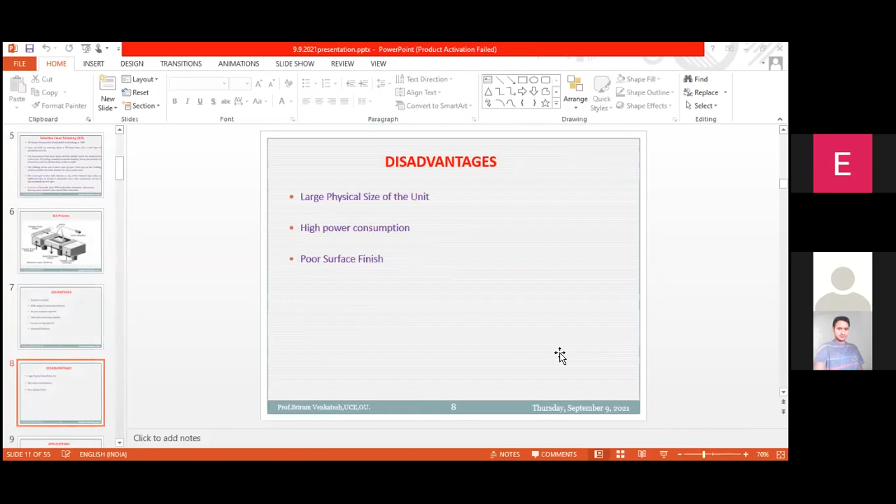After that, we will show a direct live demo on SLS, SLA, SLM. So I already gave some insight into SLS and SLM - selective laser melting and selective laser sintering.

So SLS is the selective laser sintering process. It is the system imported from Germany, and the model name is Formiga. The working principles must have been taught in previous sessions.

But instead of wasting time in that, I will directly show the SLS system. Similarly, selective laser melting - recently, less than a year ago, we procured the system from Germany again. This is also selective laser melting, the SLM 280 model, and another technology called PolyJet, Stratasys Objet30 Pro is the model name.

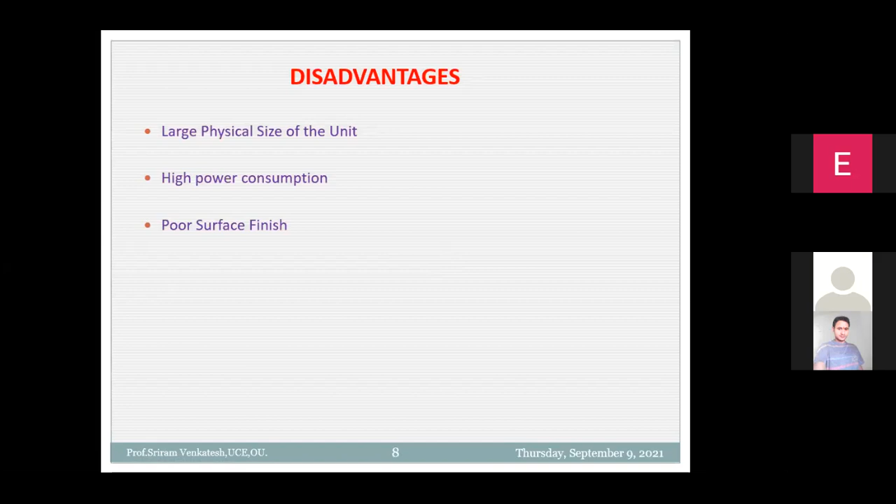So the disadvantage of SLS is the large physical size of the unit - like almirah, that much space is required - high power consumption and poor surface finish. But in spite of these, we cannot really call them disadvantages, we can call them limitations, and in spite of this we use these machines extensively. Right from 2008, we are using it, and a lot of MTech and PhD students have completed their projects, including Dr. Manamadacharya, who did his MTech project on this machine.

Applications include concept models, functional parts, and patterns for castings and metal tools. Machine capabilities: minimum layer thickness is 0.1 mm - we don't have control over this minimum layer thickness, we cannot increase or decrease it, so it's a fixed value.

The minimum wall thickness that can be built is 0.4 to 0.5 mm, because the laser beam diameter itself is 0.5 - that's why we cannot build less than this. The properties are almost the same in all X, Y, Z directions, and the surface finish we get is in the order of 10 microns.

So actually, this operating temperature - we can use these components produced from SLS directly as functional components. The only limitation is, instead of normal temperature, it will be 100 degrees centigrade. That means, since it's plastic, we can use the functional prototypes or components produced from this machine only up to that temperature.

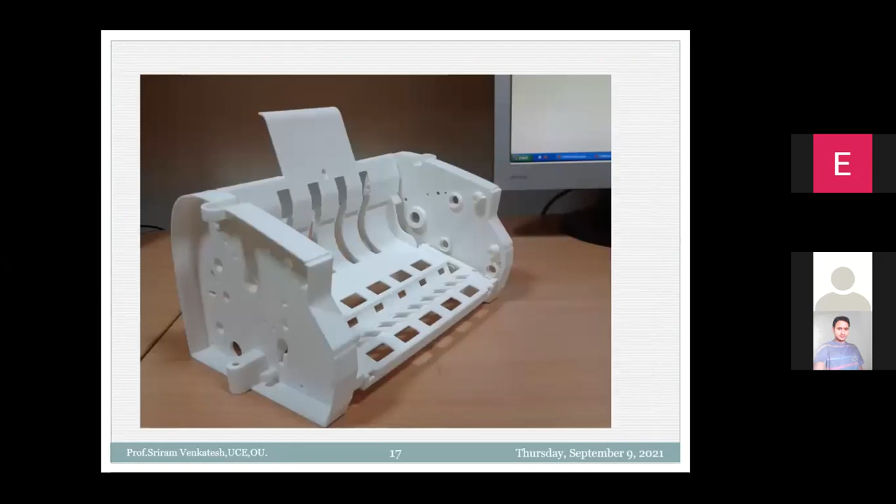These are already things we have seen, so in my presentation we have seen all this. Next, SLM, selective laser melting.

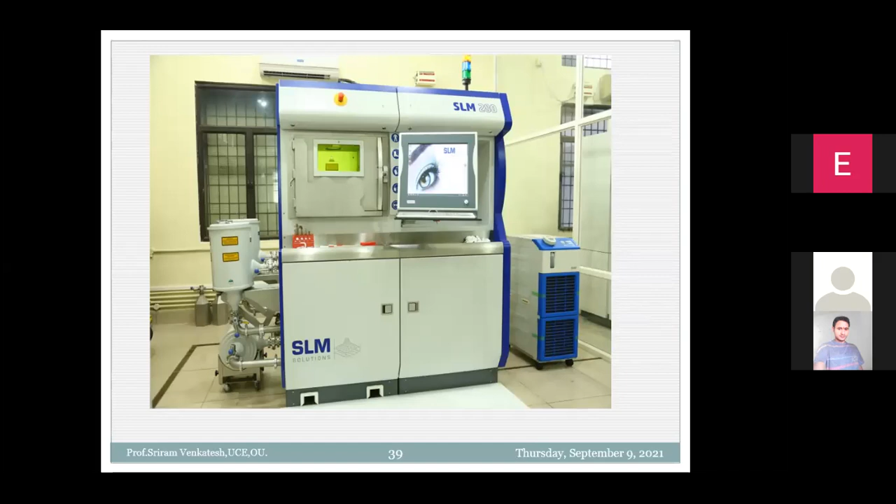This is actually the machine we showed yesterday. Right now it is loaded with aluminum alloy, and the building process can also be seen. Then this is the chiller, this is the powder sieving machine, and this is the vacuum cleaner.

The materials that can be handled have also been shown, and these are the materials. Out of this, stainless steel was already built earlier, and titanium also built. Now, aluminum alloy, for one of the research scholars, we are building samples for UTM, the universal testing machine, and that building is underway.

It is building, building is underway. We will show the building process and each and every part physically. So these are all the same, and Polyjet was also explained.

This is actually the Polyjet machine. Instead of showing directly what is the use of it, I will go through each and every machine, starting here with SLS, selective laser sintering.

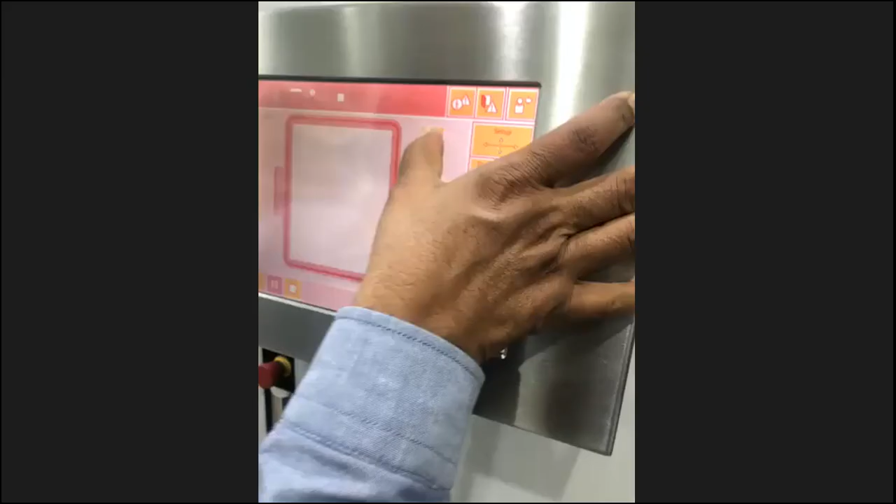And then if you see the layer, zero layer, first layer, second layer, like that, layer upon layer will be built up. See, 14th layer, 15, 16, 17, 18, 19, 20, so it started, layers are started now. And if you go on increasing the number of layers, you can see like this.

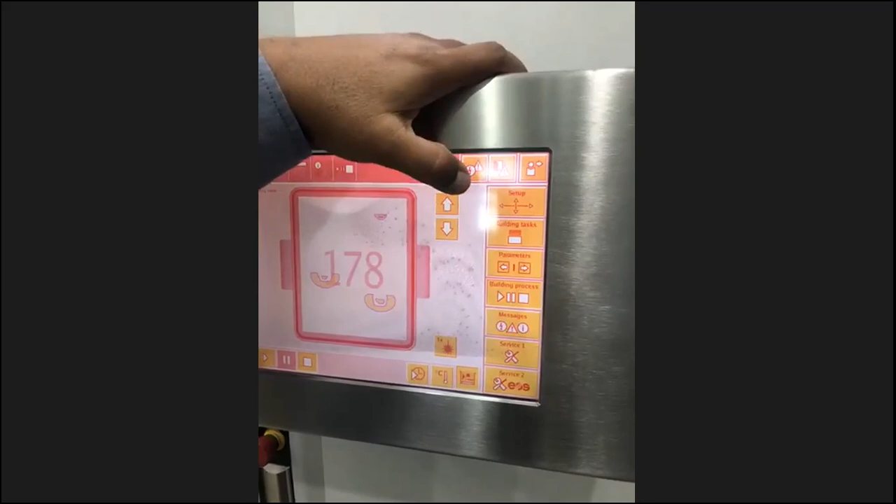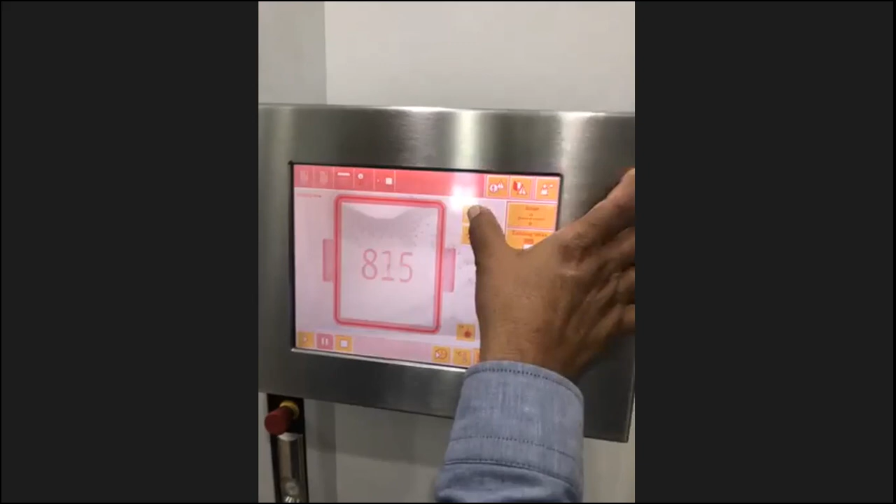So like this now, the cross sections of each layer, the cross section of the component of each layer is displayed here. This is the 815 layer. How many layers are there, we can also see. 2000, 3000, 4000 like that - how many layers are there. 1587 layers are there. So while building, it will show which layer is building.

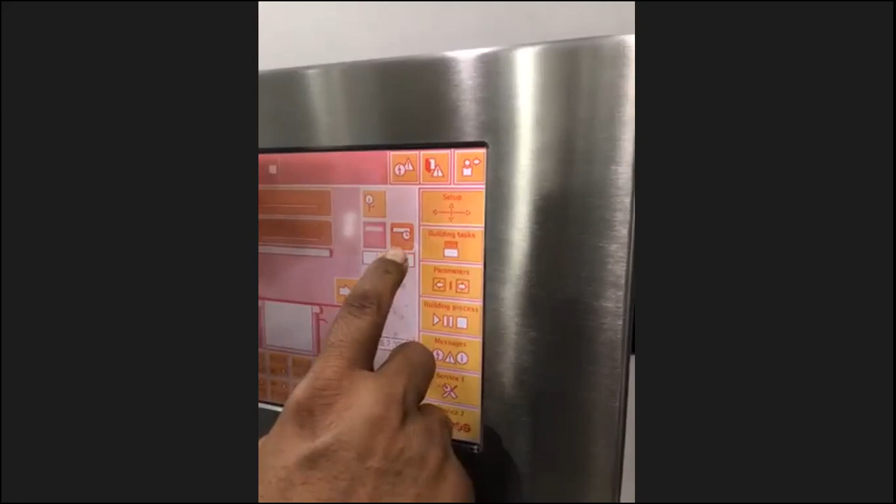We can move the recoater manually left and right. After closing we cannot move, but since it is not running, we can move the recoater left and right. This is called the recoater, and this is the preheating icon. It takes around 1.5 to 2 hours for preheating, and this is the building task we have already seen.

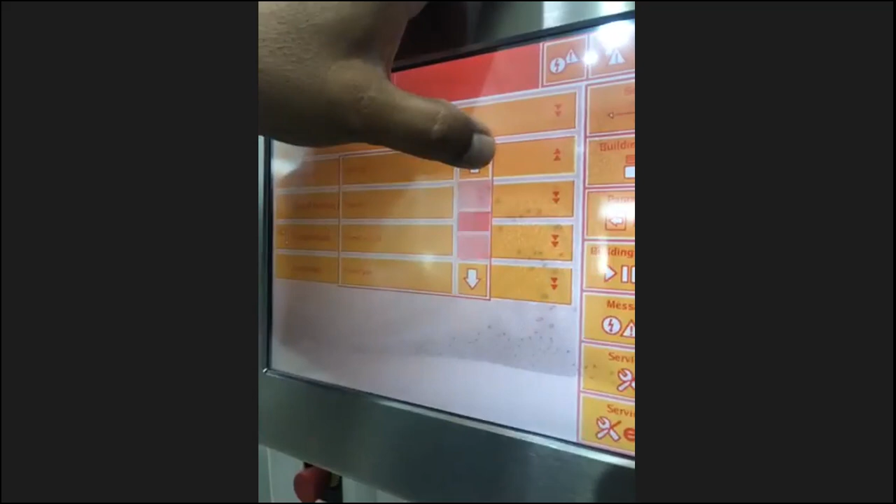PrimeCast, PrimePart, like this - whichever material is loaded, that you have to select. So in this case, now in this presently...

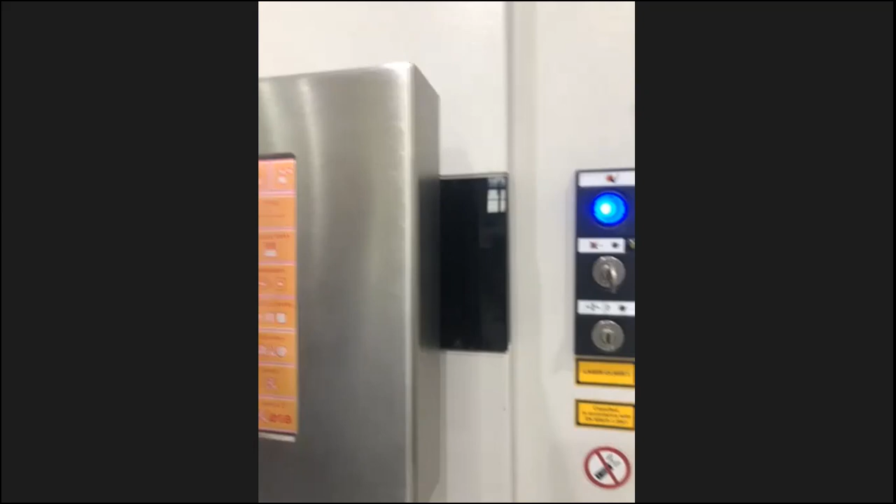Not necessary. Anyway, next is the building process. The building process we already have seen. Building parameters.

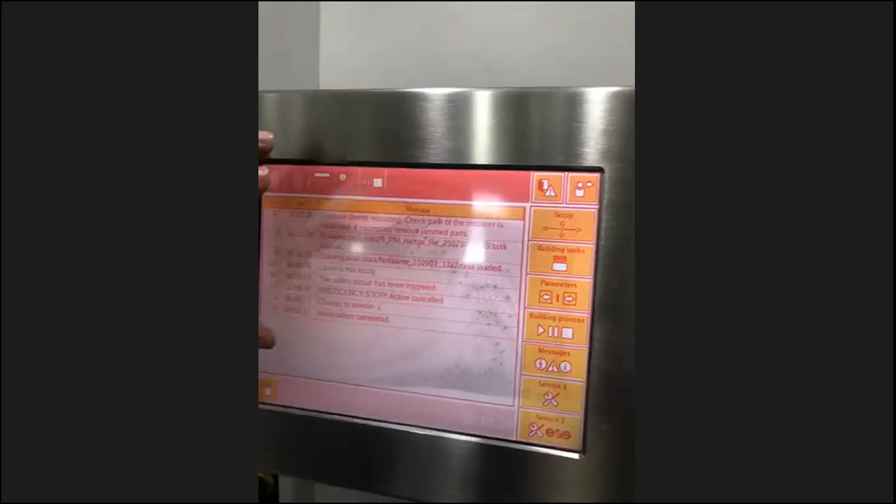Okay, now gone. So the messages you'll see - every message is seen here, like at what time you are operating, installation complete, change to powder 2. So all the operations whichever carried out are displayed here, and the rest of the things are only done by the company people.

This is actually the shutdown button, and these are the items which are to be removed. So now all the items are removed, and this is actually a bin.

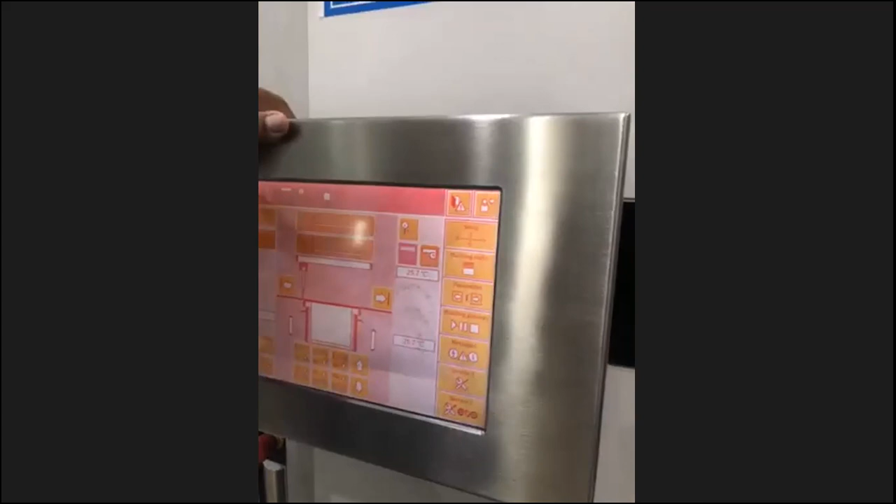So there are two bins - number one bin, number two bin. If you want to make the first bin active, it will be pressed here. Now the second bin is active. So there are only two bins. Whichever bin you want to draw material from, that should be on.

Or otherwise, if one is empty, automatically the second one will be taken care of. So these are the bins you can see - those are the two bins.

Just opening the chamber. I'm just opening the chamber. Actually this is a bin. This is the x-axis, this is the y-axis, and this is the z-axis, vertical is the z-axis. So this powder is polyamide powder, which is 60 microns sized.

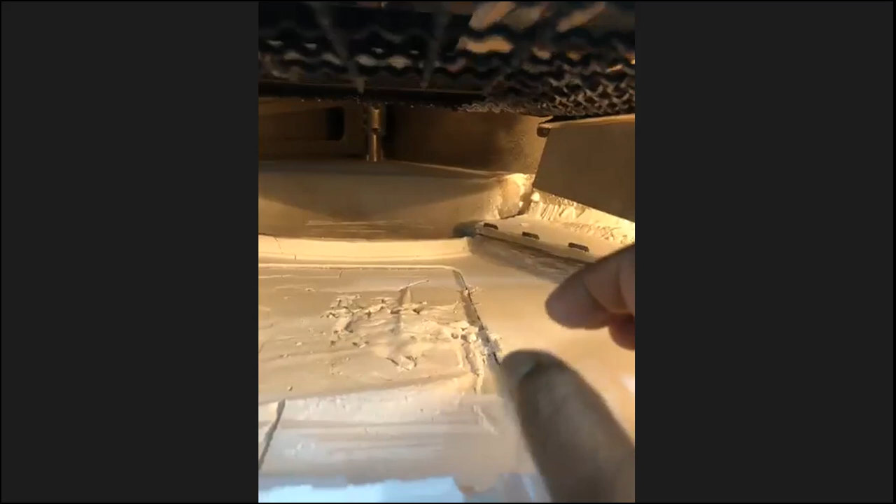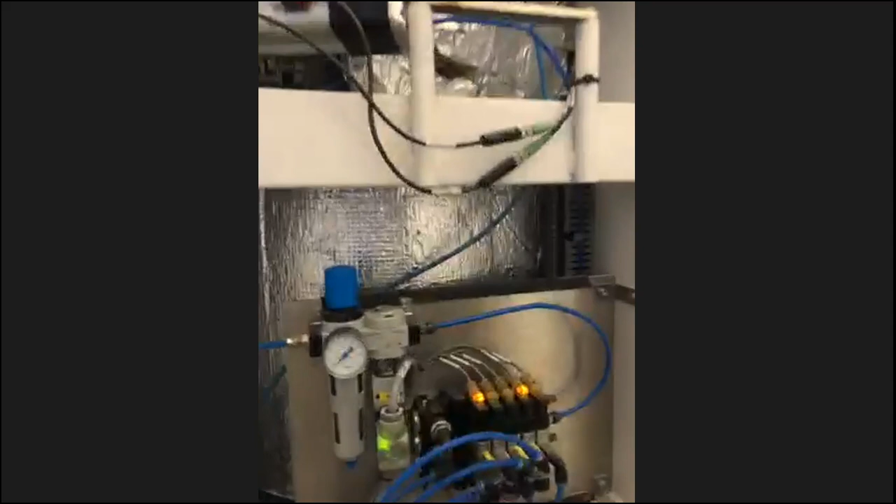Just I am there opening the rear door of the machine. So you can see the Festo pneumatic control system, and here this is the recoater pneumatic system. And these are the two bins, number one and number two. So automatically the bin will shift from one bin to the other if one is empty.

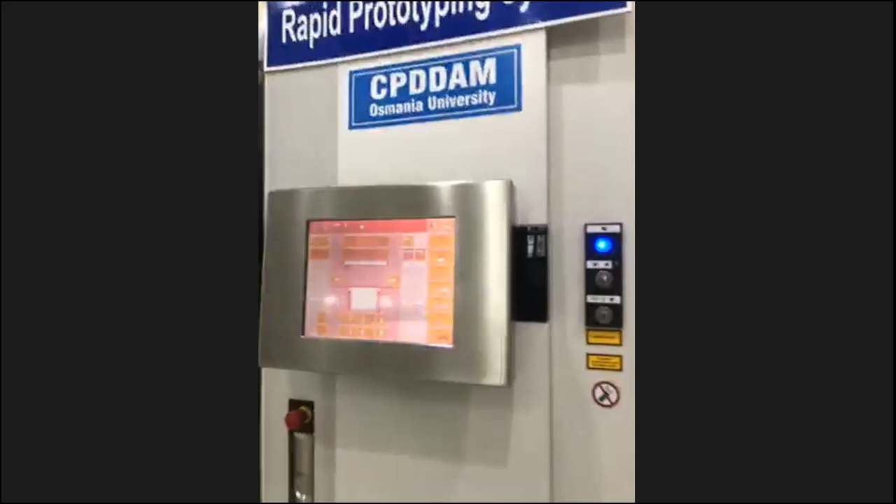So now the software what we use here, third party software is Magics. So this is actually Magics. This is a part, and we can do editing here, and whichever view you want, you can see.

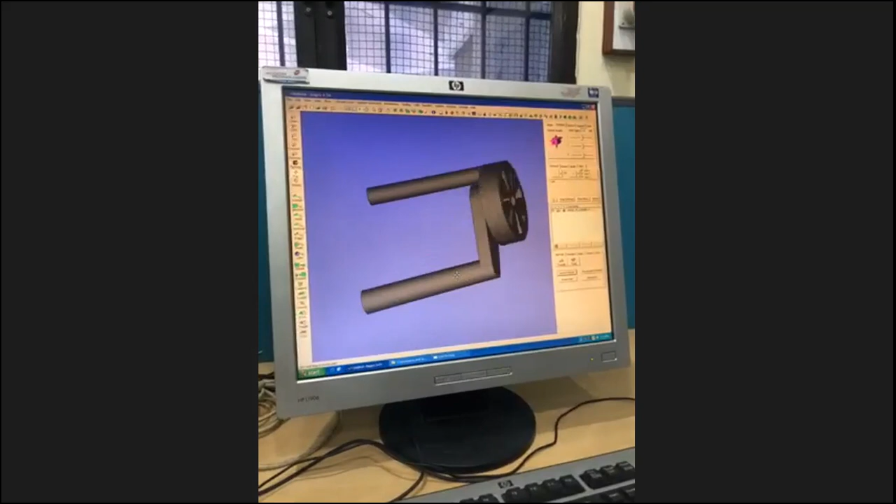So these are the views, and this is the bin size. So this is the x-axis, this is the y-axis, this is the z-axis.

Okay, what is that? Just I am loading the file. Load the file, part - I don't want to know. Okay, next, load the file - prosthetic hands. So that, in that, now we are not able to see now.

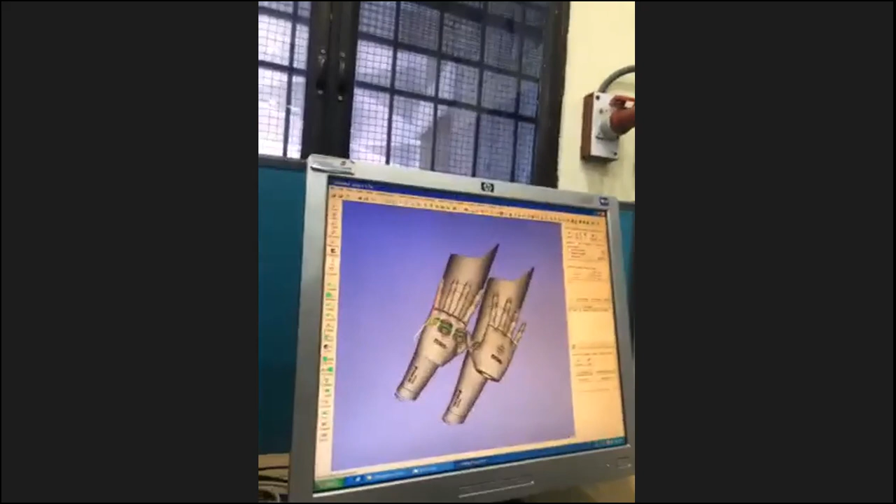Where is that view? See, we can see different angles. We have reoriented to fit into our bin. So instead of putting straight, if you put straight, our bin size is only 330 mm. So that's why we tilted this a little, so that in a single go we could build all 4 components at a time.

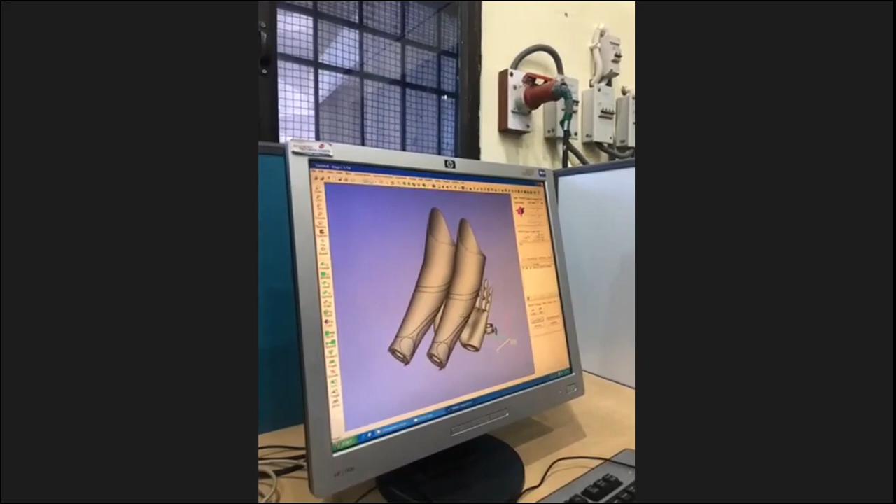So this is the Magics software wherein we can put text, annotation, stacking, etc. This is actually the build size. You can see the inquiry, what is the maximum height of the component. You can see the Z height is 253.532 mm. X-axis is 184, Y-axis is 237, Z-axis is 253. So to save time, as far as possible we have to reduce the height of the component in the Z direction.

After this, it will be sent to the 3D printing machine through an RS-232 cable from this computer to the 3D printing system. Just now we have shown how to load it. Whatever name you have given here, the same name will appear on the monitor LED screen. That should be uploaded into the 3D printing system. And after 1.5 hours of preheating, it starts building. Next.

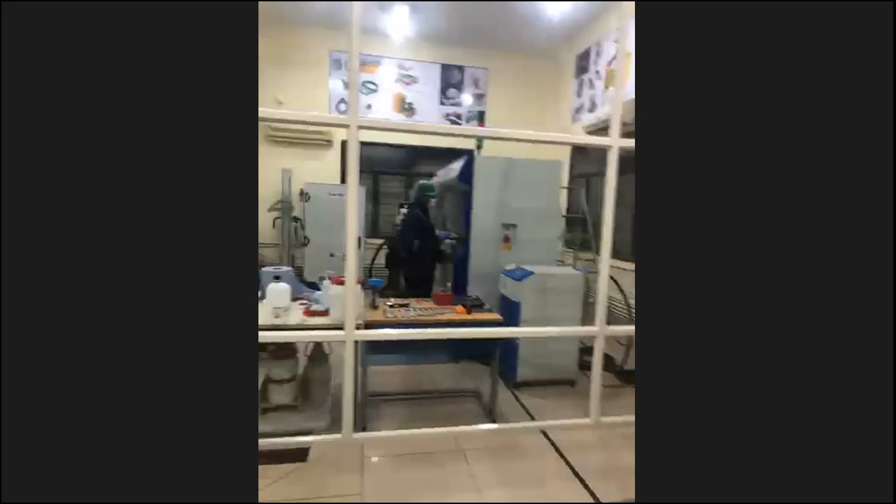So Dr. Chari, sir. Yes, sir. Dr. Chari. Sir, tell me, sir. Yeah, so we are moving to the other machine because a lot of noise will be there. So we have seen the SLS, and then SLM is running. That's why a lot of noise is coming, and maybe the participants may not hear properly. Okay, sir. We will explain a bit louder. No issue, sir.

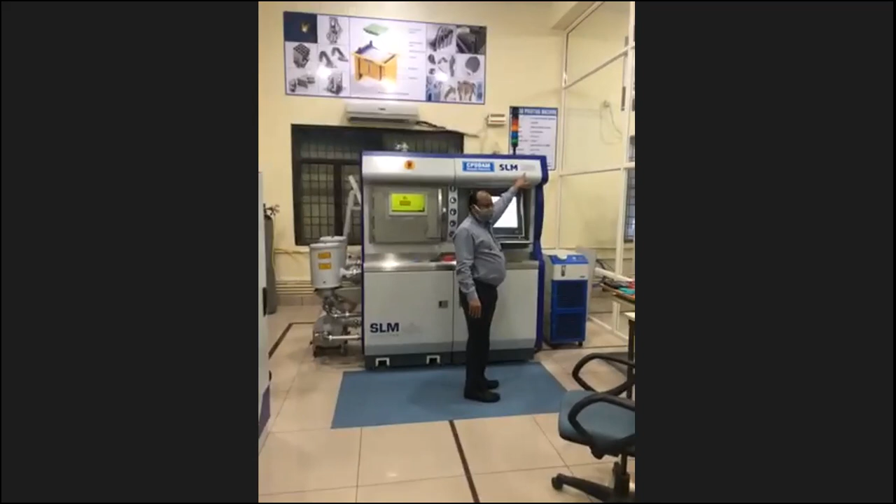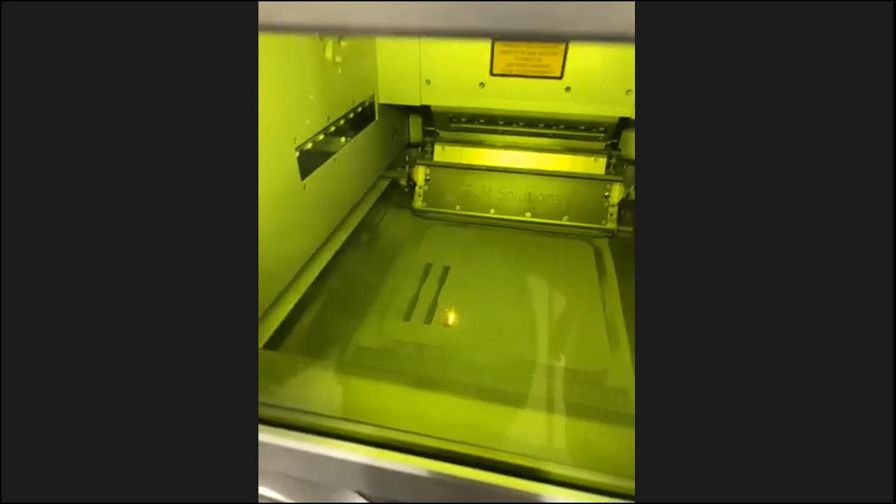So you take a long shot from there. Our center is a center for prototyping and testing of industrial products. This model is the SLM 280. And we have kept 3 samples here. Right now aluminum alloy is being printed, and printing already started. To coincide with your demo and our requirement, we started building the component in the afternoon, so now we can see the 3D printing for a while. These are samples for one of the research scholars working in the 3D printing area, for universal testing machine.

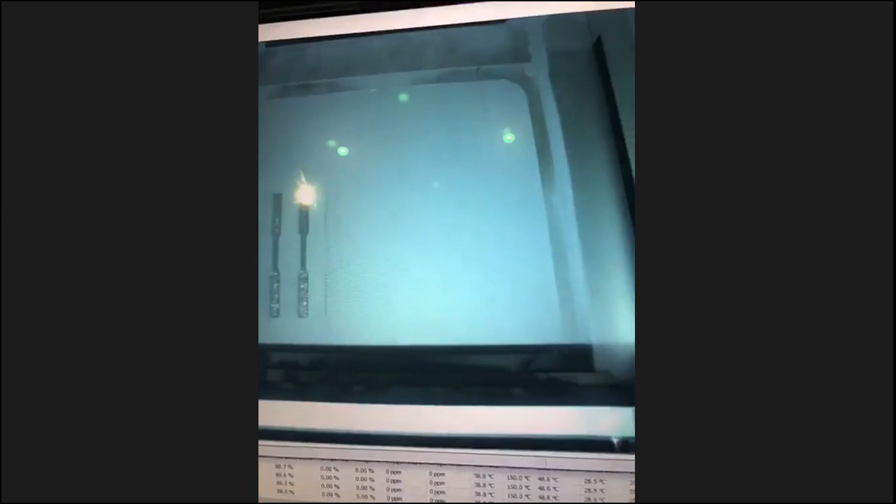Recoating is taking place. The recoater came from back to front, coating one layer thickness of aluminum powder, and then again it is printing. The camera is in. You can also see it on the monitor. Earlier I showed it from the machine; now this is on the monitor. It has a built-in camera to view on the monitor attached to the system. It seems rough, but it depends on camera resolution. You can see it will go back again.

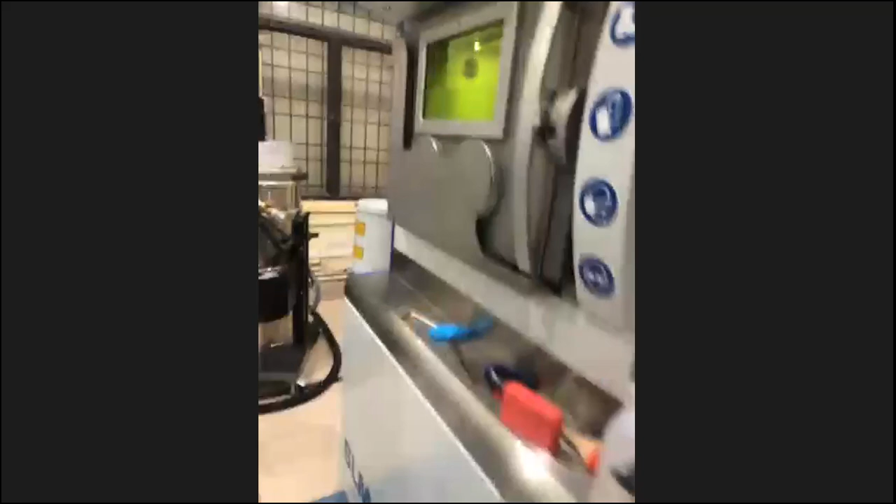So the operation is continuous. Now I will show some of the parts. This is a chiller. The chiller is used to cool the chamber through a coolant. And this is a powder sieving machine, which is used to sieve the powder; the left out portion in the bin is sieved here.

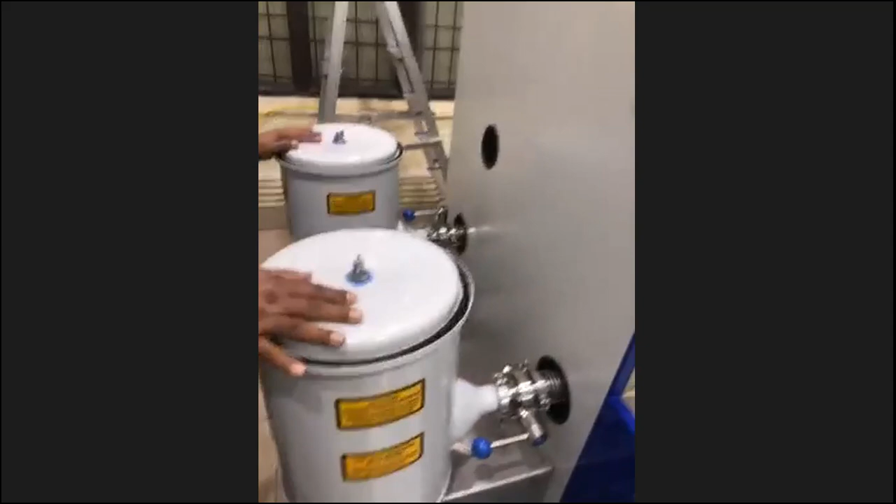Next, this is a vacuum cleaner, which is used to clean the machine. If you are changing from one powder to another, the old powder must be cleaned thoroughly. These are the filters. And we are using argon and nitrogen. Nitrogen is built in, but for argon we have 3 spare cylinders, which we use for building titanium components. This is the rear side of the SLM machine.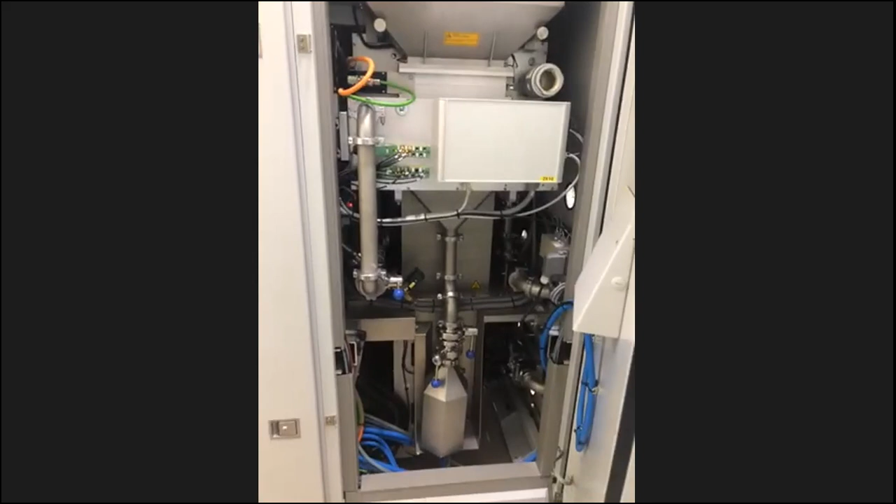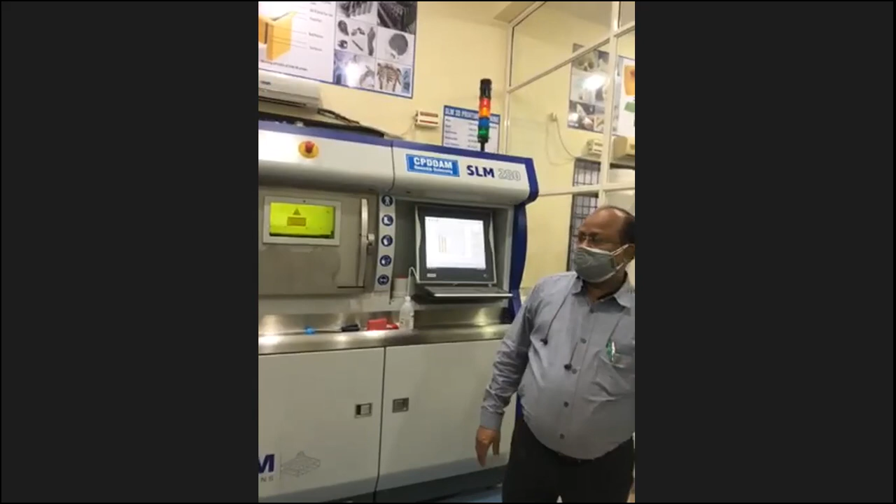Anything else? This net? Okay. So the rest of the things will be explained by my research scholars individually. Wherever they have expertise, they will explain. And I'm handing over to Mr. Pramod. Okay. Yeah, more details you can give.

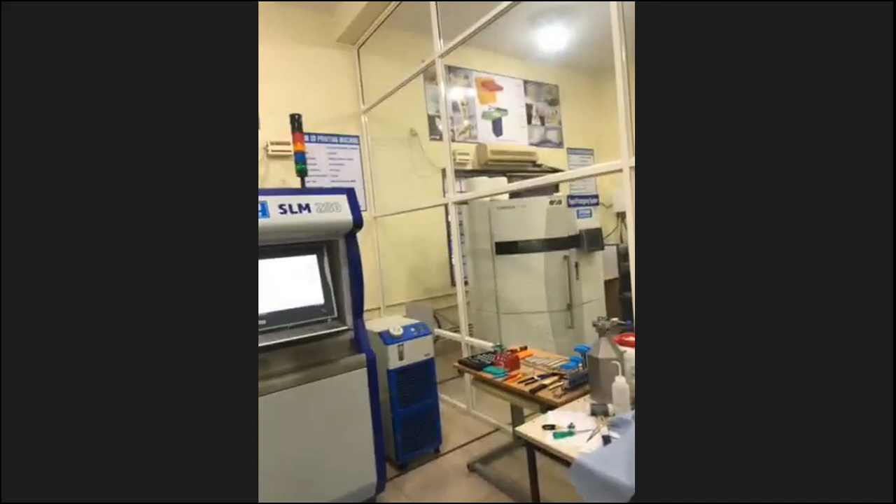Good afternoon, everyone. This is Pramod. I'm currently working as a technician here, and this is an overview of SLM as briefed by our Professor Sriram Venkatesh sir, which has a build chamber volume of 280 by 280 by 360, and currently test specimens are being printed on this SLM 280. Three of them are with different build strategies. They are getting printed.

Next, about the SLM, there is a recoater here which spreads the powder all over the bed, which is a bidirectional recoater, which means it will recoat in the to and fro motion, and it will load the powder from the hopper. It's a gravity filling system, and the collected powder in the hopper will be transferred to the reloader, which then transfers it to the recoater.

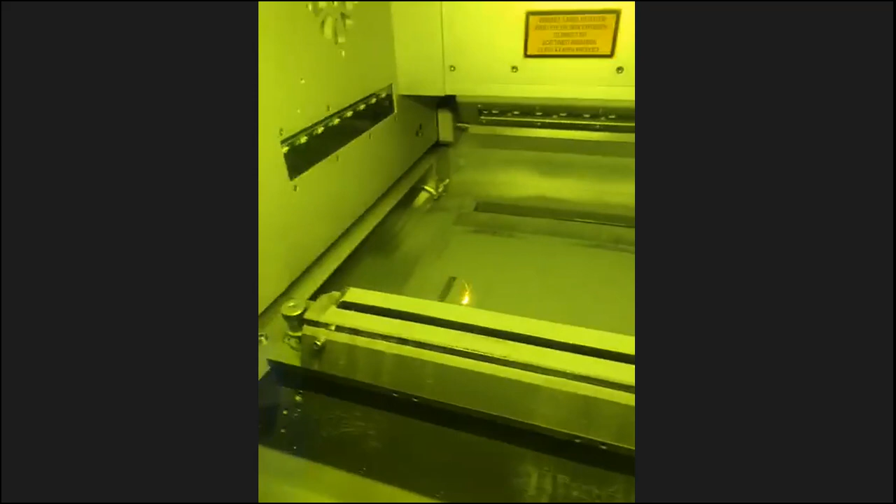So as you can see from the right side, there is an inert gas flow. It will continue until the print is done, and the spattered particles during laser exposure are blown away by the nitrogen gas, at a speed of about 17 meters per second, to the filters, as explained by sir.

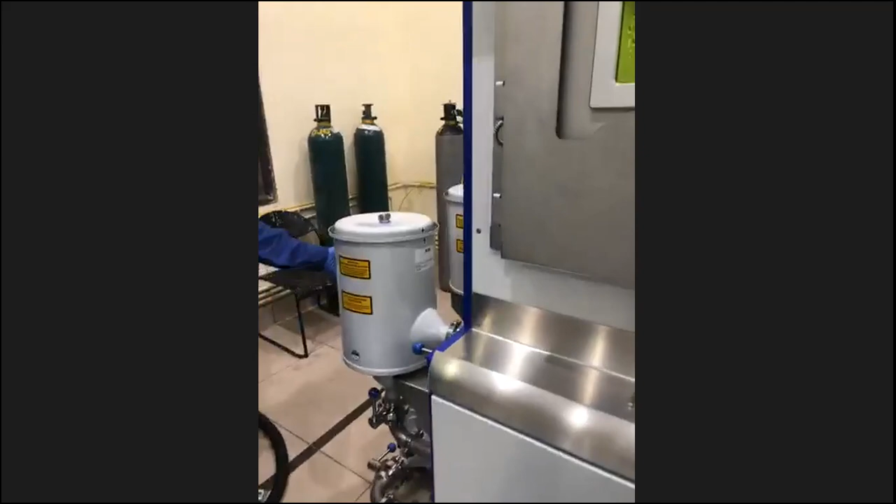These are very essential here to collect the particles which are higher in size, like above 45 microns or 50 microns powder will be collected by this, and the pure gas flow will be continuous without any particles. So there are two kinds of filters, H13 and H14, where H13 captures 99.97% of the particles, and H14 is about 99.99%. So the process continues until the print is done.

And let me talk about these gas cylinders. These are argon gas cylinders, and these are nitrogen gas. Argon is basically for the titanium alloys, which are very hard to print actually. Nitrogen is for all the materials like SS316L, AlSi10Mg, CuSn10; all other materials we can go for nitrogen because those materials are less reactive than titanium.

So next we will talk about the chiller. This is a chiller; during continuous running of the machine, heat will be generated. So the heat has to be dissipated from the machine. Otherwise, the parts may be damaged, and it will cost us a lot to repair. So the chiller is the essential thing.

And the PSM, let me talk about the PSM. This is a sieving machine where you can see it's a vibrator. It will vibrate, basically used for segregation, which means the higher size particles collected in the tanks will be segregated, and there will be a mesh. Yeah, you can show the running condition, or you can just switch it on. So you can see it's vibrating. Those are called bellows, which are used to segregate the melted particles from the unmelted powders. So this will be helpful.

And you can see, first of all, we need the oxygen percentage to be less and the nitrogen percentage to be more. It has to be in inert condition for the process to take place. So we will increase the N2 percentage by supplying nitrogen externally, so the oxygen level will automatically decrease.

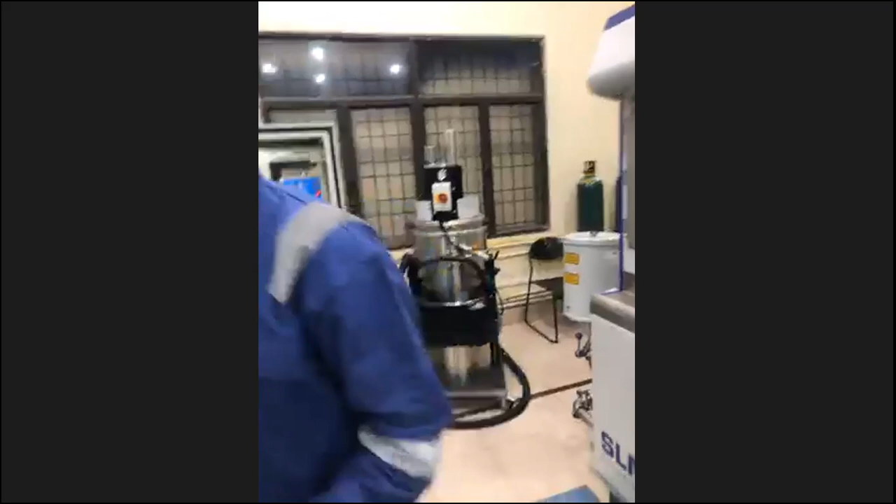I will tell you about the part loading. Before that, I will explain the Additive Designer, which is a slicing software where we have to slice the part first. This is the Additive Designer software. So first we have to select the powder, select the material that you want to use. Here you can add your material as the machine requires, like AlSi10Mg, CuSn10, SS316L; we have to add it manually.

The density is the main thing in this software because we need the cost estimate and the time estimation. So we have to add the material, and density is a must. Next we go to the machines. There are two kinds of SLM 280: twin laser and single laser. Presently we are using single laser, where you can change the materials previously stored in the materials window. Currently I'm using AlSi10Mg, so I'm selecting AlSi10Mg, saving it and closing it.

There are two options called twin laser and SLM 280. Now I will select the SLM 280, which is a single laser. So this is the overview of the machine design. It's 280 by 280 in X and Y, and Z is about 360. And let me load the part.

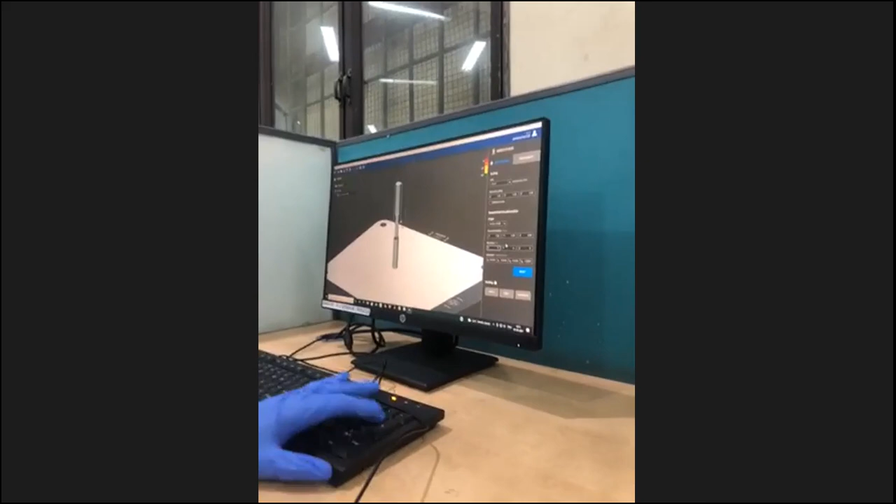Here you can see the part, which is a specimen. It's now running in the SLM machine. We can rotate it, transform it, and we can scale it even here, not just in the 3D modeling software. We can scale it here and we can transform, we can rotate everything.

So I will give 90 in the x direction. So it is now parallel to the bed. Presently it's going in the parallel direction only, parallel to the bed. So I am explaining in the parallel direction. Now the part is loaded.

Next, we have to get the support structures. Support structures are a must for metals, because of the density of the part or material. So support structures are a must. And I will build support. Overhang angle is a must, because above 45 it's fine, but below 45 the support structures have to be generated.

So I will give it 45, to tell the software the angle of 45 degrees. Below 45 degrees, support structures have to be generated. That's my condition. It calculates the regions, and wherever a region is less than 45 degrees, it has to produce the support structure. So I'm giving the block support.

There are different types of supports: rod, block, H cell, line, and tree. These are different kinds of inbuilt support structures. You can change various parameters here like the height of the block, width, and the square shape of the cell. You can define everything here as you like, but I'm using the default one. So I will click the part and assign it.

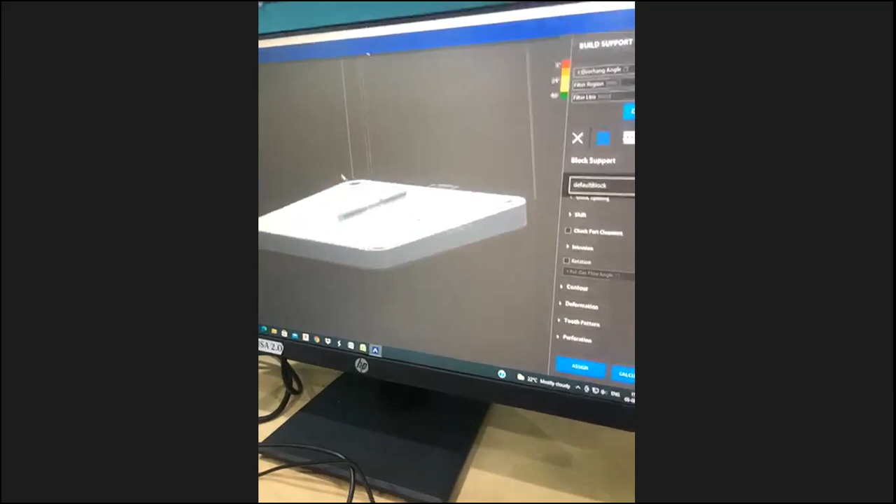Maybe some technical issue with this software. They will also show the post processing of SLS machined parts, then SLM, how the parts are being ejected, and also the cleaning process for the parts produced from selective laser sintering.

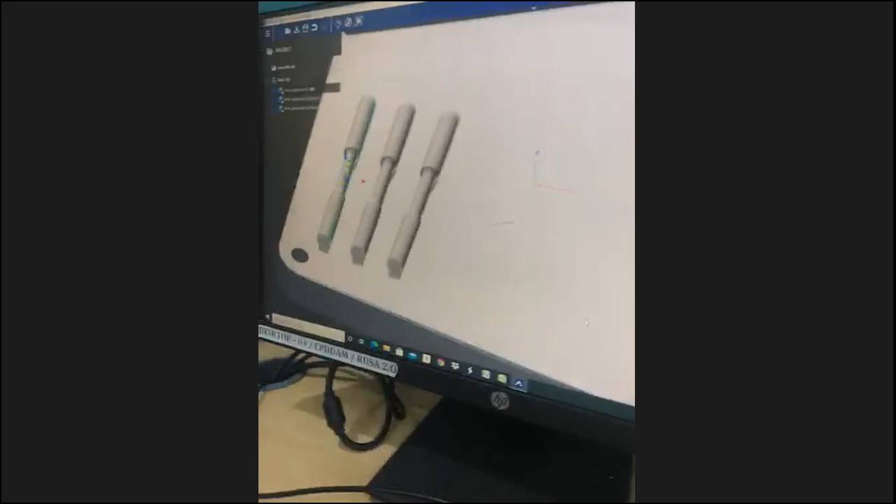Okay, now you can see the support structures have been produced, and we will go for the nesting. Nesting means how many parts you want to print. Presently, I want to print 3. So in the x direction I will take 3, the distance between the parts I will give, let's say, 15, and to the edge, meaning the build platform or substrate plate edge, I will take 30. So it will be rearranged like this, and the support structures generated for one component will be generated for every other part also.

Finally, the print depends on the build strategy only. If you want the print to be completed, the build parameters should be suitable for the part. Otherwise, you will get high or low porosity levels. It depends totally on the build strategy.

You will have scaling here also, scaling and slicing. Slicing means which slice thickness you want the print to be completed with. We can give the slice thickness here as 30, 40, 50.

Next, it's volume, which is the scanning strategy, how to scan. We have different types of scan strategies: parallel, stripes, chess pattern, and none. We can go for one of these. Presently, the machine is running on the stripe strategy. And next, supports, how you want to give the supports.

What is the slice thickness of the supports to be? If we go for 30 microns layer thickness, you can give 60 microns for the support structures, because anyway the support structures have to be a point contact with the part and the substrate plate, so that the removal may be easy.

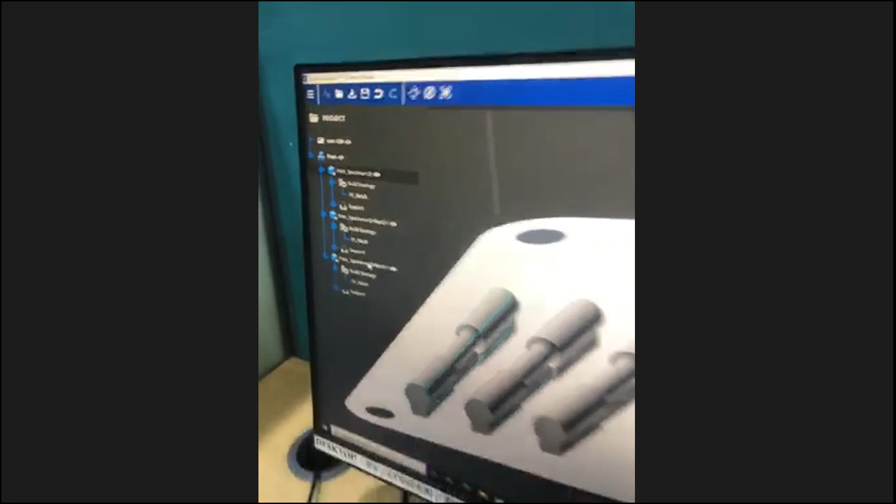So I will individually assign. So it's been assigned here. You can see build strategy P3. And for this also, you can see build strategy. So you can see all these things, whatever strategy has been taken, has been assigned to the part. Now I will calculate the SLM file, which is basically .sli, which will be understood by the machine.

So we'll go to desktop. I will save here as a part. Let's say I will save it here. Now it will slice. So now the slicing operation is being done. So it's showing 434 layers here. You can see here the part is being,

you can see as per the strategy, it's going in 0 degrees now. The overall build will be in the 0 degrees direction only. The laser will expose in 0 degrees. It will melt the part in 0 degrees only totally. So next, we need to calculate the time for that. So we will go for the cost estimation.

It's now calculating time, 5 hours 37 minutes. It may be an assumption. It just shows the exposure time, but not the recoating delay time. It's not calculated. So let's say we will add 1 hour or 1.5 hours extra for that. So it will show how much material it needs to build the part. Part material is 84 grams, and support material is about 8 grams.

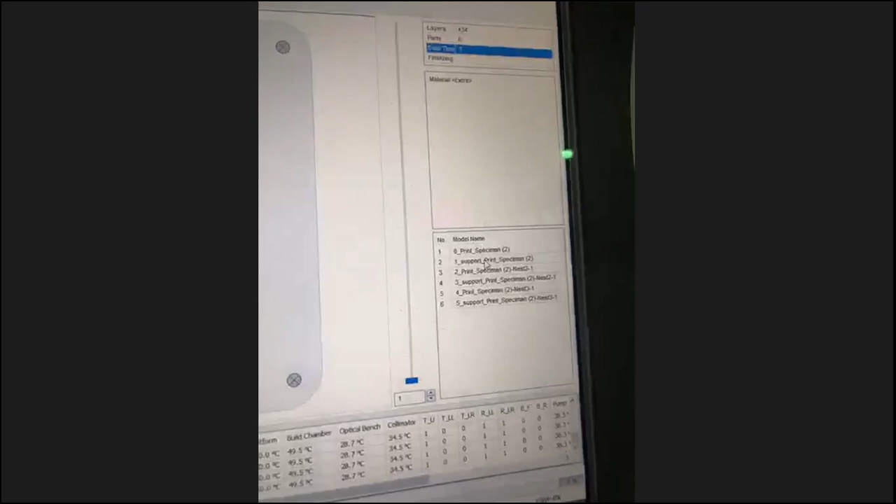So now it's showing a layer. You can get how many layers, parts, how many, 6. Why 6? Because it will take them individually. The part is a single one, and the support structure is another one. So even though there are 3 parts, it's showing 6 parts. So it will calculate support structures as a separate thing.

Now it's calculating the time, how much time is required to build. As I said earlier, the time shown by the additive designer is not the original one. Calculating the recoating time and the delay time, it will estimate the total time of the build.

Next, these are options. This is for play, which means to start the print. This is for pause. If there is any lift kind of thing, the part is hitting the recoater, then you will pause and search for an alternative, how to complete the print. This is for the total stop, the build will be totally stopped. And this is the chamber opening, how to open the chamber.

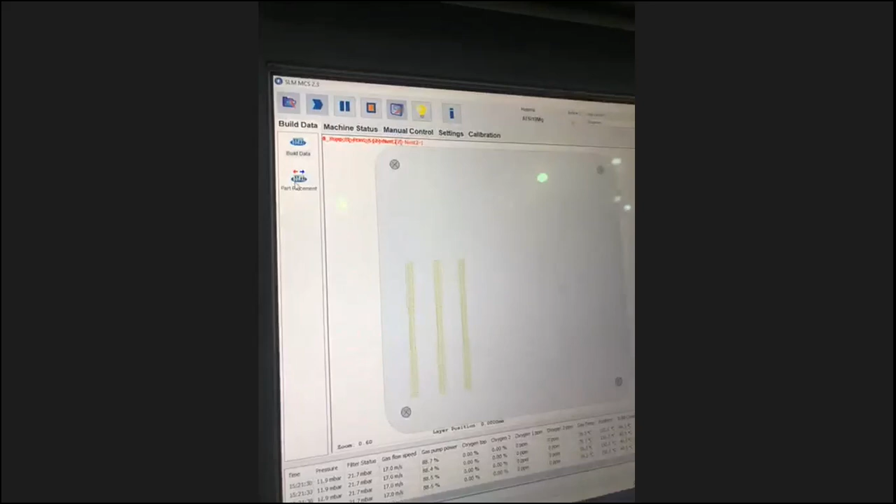Next, we can place parts here also, not just in the additive designer. The parts can be moved from here. So by giving translate or rotating angle, here also there is a provision for those things.

And now for the build status, while running, it will show everything: current layer, build time, 6 hours, the remaining build time, how much is completed, previous exposure time, recoating time. You can get the oxygen, and here you can see 12 millibar is a must while the print is running.

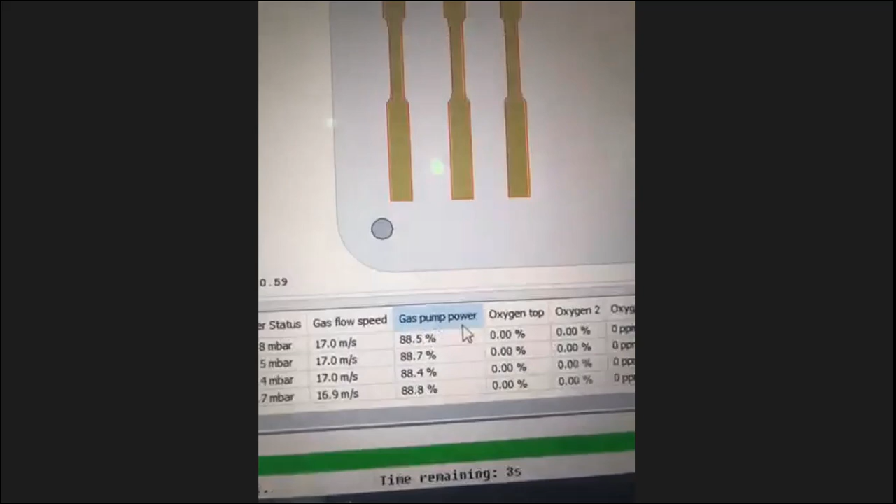And filters, it depends on the purity, I mean, on how many particles have been congested. The filter pressure may be increased or decreased. Gas flow, now it's 17 meters per second, as I said. Gas pump pressure, power, it's running at 88% now.

So oxygen top: while running the print, the total chamber and flow lines have to be in an inert condition, which means the gas has to be pumped all over the chamber and the flow lines. So gas top, oxygen top related to the chamber. Chamber now is 0.00%, which means there is no oxygen. And oxygen 2, the flow lines: the flow lines which are connected to the pump, the chamber, the filters and everything should be 0%.

Next, platform heating, to reduce the distortions in the part or in the substrate. To maintain the temperatures inside the chamber, the platform can be preheated. Now it's running at 150 degrees centigrade. So this is for the build chamber and optical bench. It shows everything. Optical bench is nothing but the laser, collimator, everything.

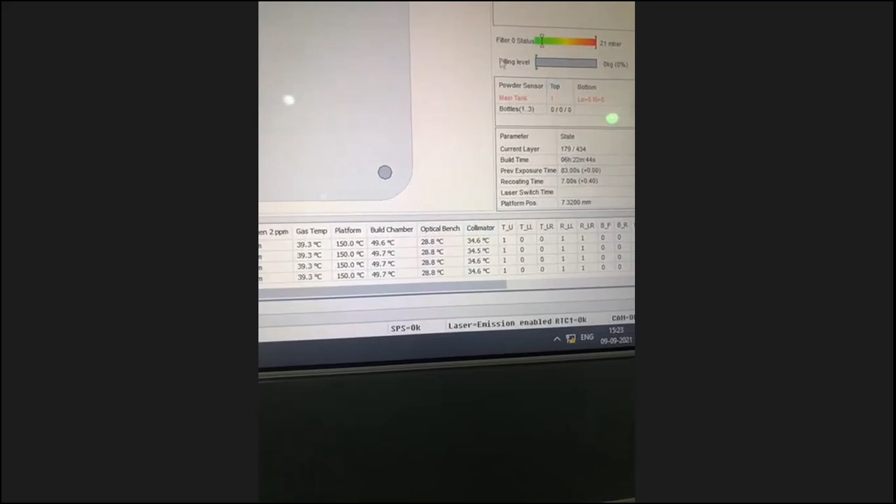Next, let's go to motor, where you can position your platform, to raise or lower the platform manually here. First, actually, we need to go for the manual substrate plate leveling. Next, we have to recoat the layer to a minimum of 20 microns of powder on the substrate plate. There must be 20 microns only. The recoater you can manually control.

Reload: as I said, the loader, which is the middle one between the hopper and the recoater, supplies the powder continuously. And gas and temperature: I need to turn on the pump and gas control for the continuous flow of nitrogen gas throughout the process. And platform heating, here we have to turn on. Water cooling is a must.

Next, settings, where you need to select what kind of gas you want to use, nitrogen or argon. You have to select it from here.

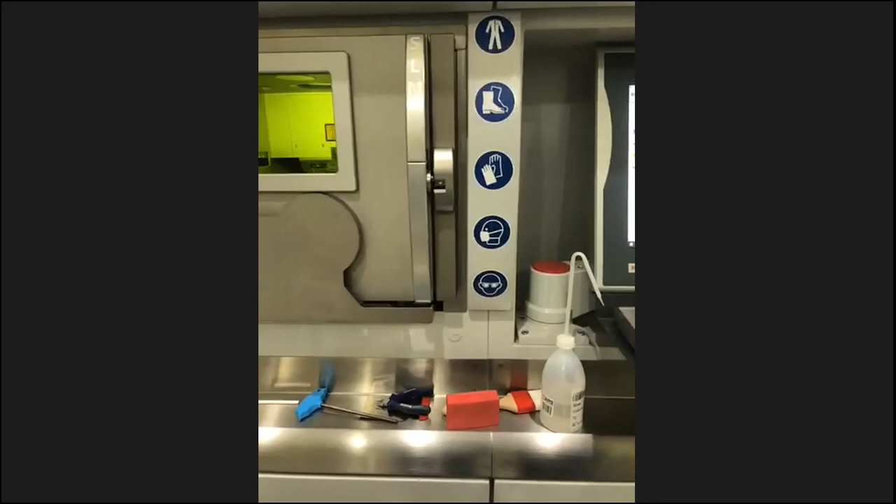Now I'll tell you the powder loading process. Here, while the recoater is moving, you can see a dump for the excess powder in the recoater. It will flow from there and be collected in the can. These are the cans, and the powder has to be sieved first.

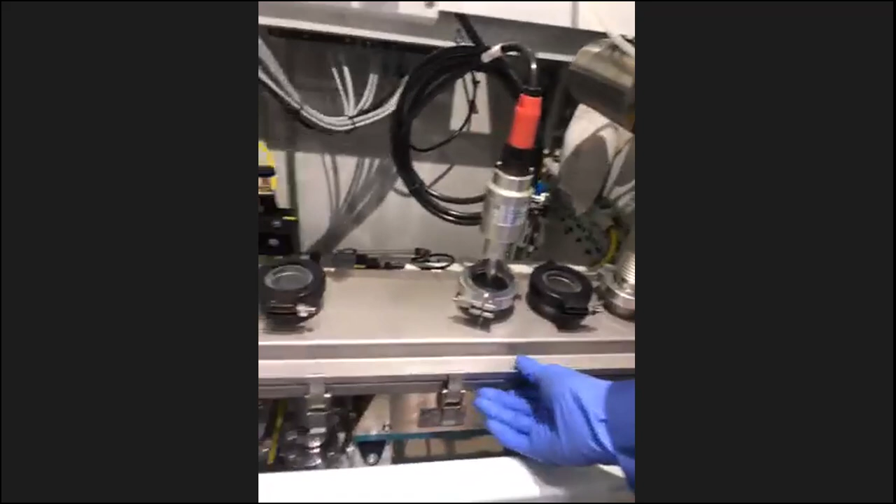So we will go to the sieving machine. The oversize particles will be segregated by the sieving machine. We put the can here, and from here it will flow and vibrate. There will be a collecting tank here. The fresh powders, about 30 to 45 microns, will be collected here, and the remaining higher sized powders will be collected there.

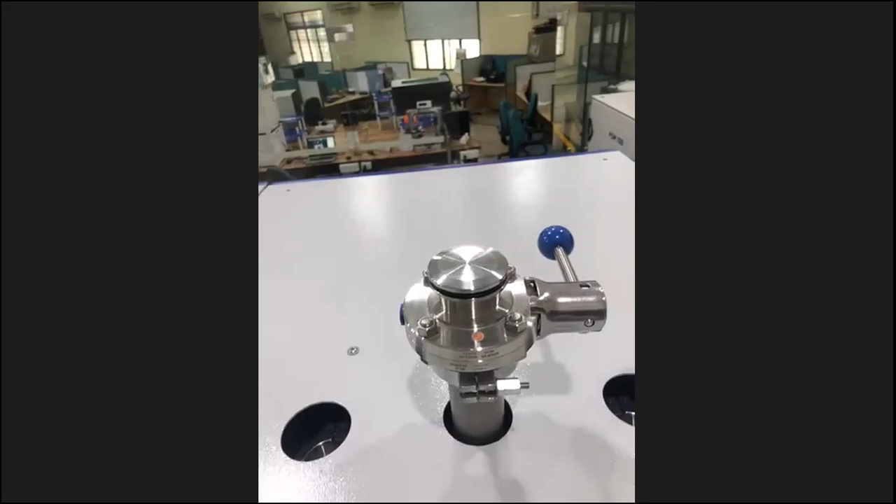This is how we remove this can, and we will load from the top here. Now you can see the hopper. It's a storage tank where you store the powders which are sieved and poured in.

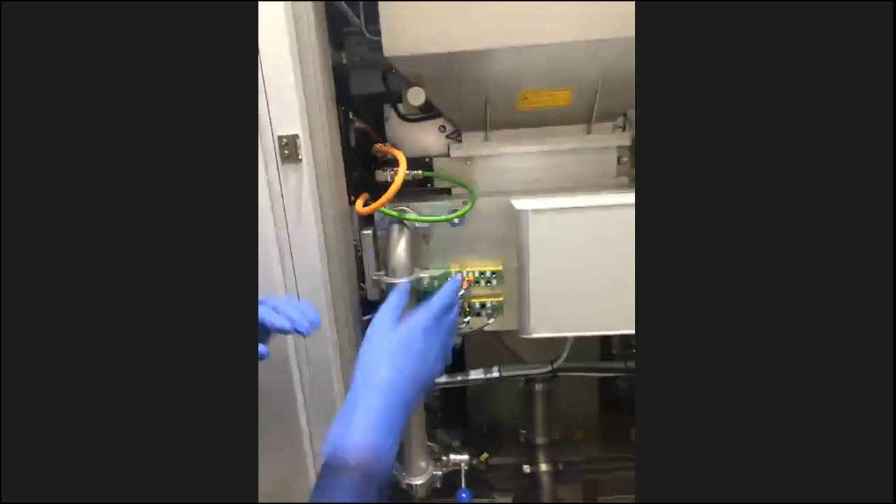As I said, it's a reloader which has fine grooves in it. It's cylindrical in shape, with 6 grooves. The powder will continuously flow down to the recoater, and you can see there is another can, the back collecting can.

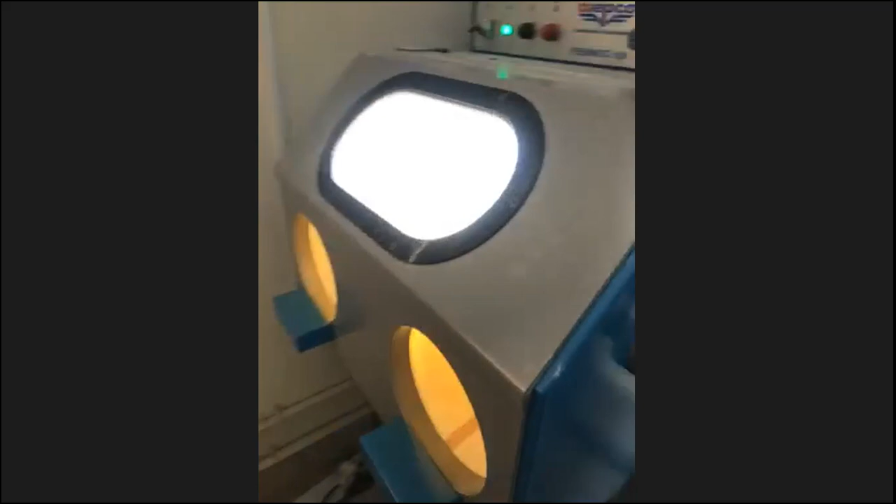After the part has been printed, we will remove it from the machine along with the substrate plate and go for post processing. Now we will show you the post processing machine. Parts produced in SLM may be somewhat rough. To reduce the roughness, we use the blasting machine. But first, the supports have to be removed, using pliers or a multi oscillating cutter.

It's a blasting machine with continuous impingement of balls, about 100 microns or less, on the part, which removes the excess material, like the bumps produced while printing. You can see there is a gun. From one pipe, there will be a flow of

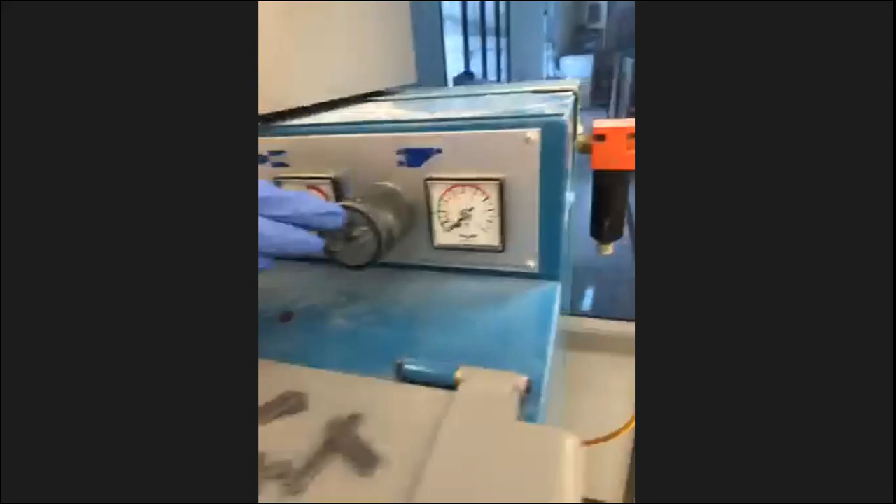presently we have SS balls here, about 30 to 60 micron size, which will be continuously flowed by compressed air from this black pipe. The compressed air is joined by the balls, and we can set the pressure here at which the compressed air flows.

Here you set the pressure, and the part will be placed here for continuous impingement. You can see the balls here: with the compressed air, the balls flow at high speed, and the impingement material removal is done.

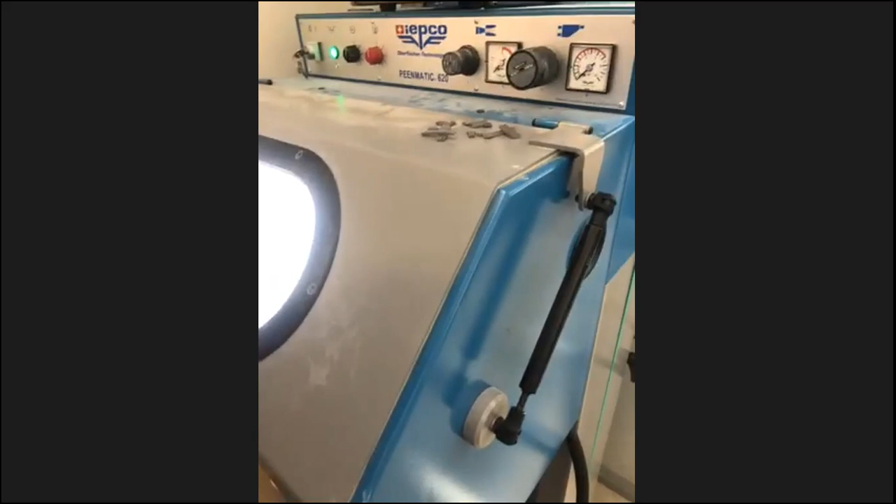Hello, is it audible? Okay, so basically the SLS printing process starts from this machine and ends over here in this machine.

Before going for the print, we have to prepare the powder. The powder comes in this bin. Once the powder is sieved and it is in a pure form, it is mixed properly with the new powder. If you want to mix new powder with old powder, once you are done, we keep it here and rotate it. This machine basically rotates the bin up to a certain cycle so that it mixes the powder pretty well.

So we will see how it mixes. We have to rotate it for a particular number of cycles, like 500 cycles, or for 1 hour, we'll leave it like this. Once the mixing is done, we keep the powder bin aside to release the static which is created during the rotation, keeping the bin idle for around 1 or 2 hours.

After that we take the powder to the machine. Sir has already explained pretty well about the machine and the slicing section. So once the print has been done, we will bring that removable chamber.

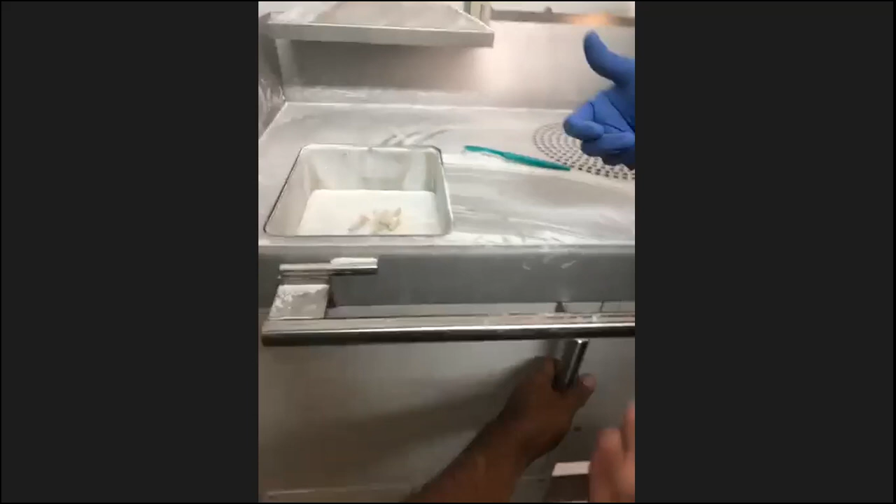So the chamber will be like this. Once the print is done, the part will be inside this chamber. We bring the complete bin here like this. It is removable, we can remove it from the machine and place it here. We close the door. This machine is completely operated by pneumatic power.

Here we can see there is a pedal. Once we press it, it will push the piston, which pushes the platform above, so that the available powder comes up, allowing us to segregate those powders from the part.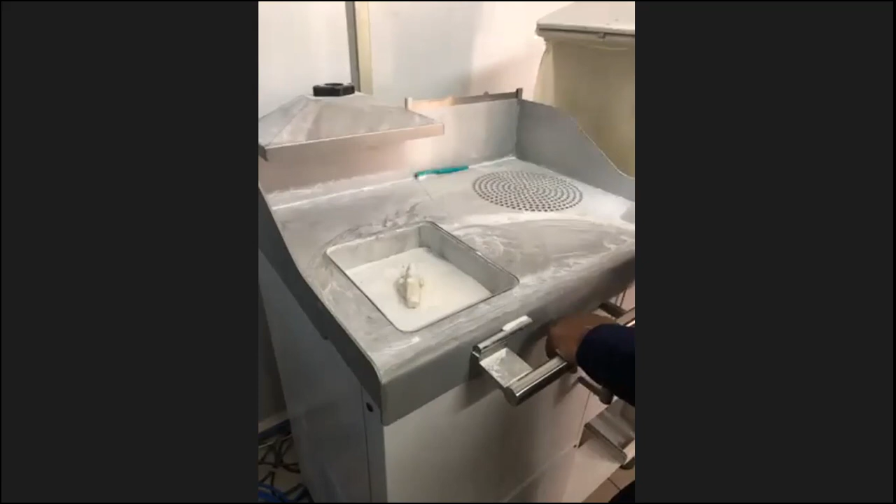Suppose this is the part we have printed. It will be submerged in the powder like this, so we cannot see the part right now, since powder will be all over it. So what we do is press the pedal, and it will come up like this, with powder surrounding it.

We will push all the powders here so that we can get this part. Once we get it, we remove the excess powder from here using some kind of brush, removing all the powder. Suppose the part is very critical and some powder is left inside which we are unable to remove.

We will go for the other machine, which is similar to a sandblast using pneumatic air pressure, which will remove the excess powder from the part, and we get the final part like this.

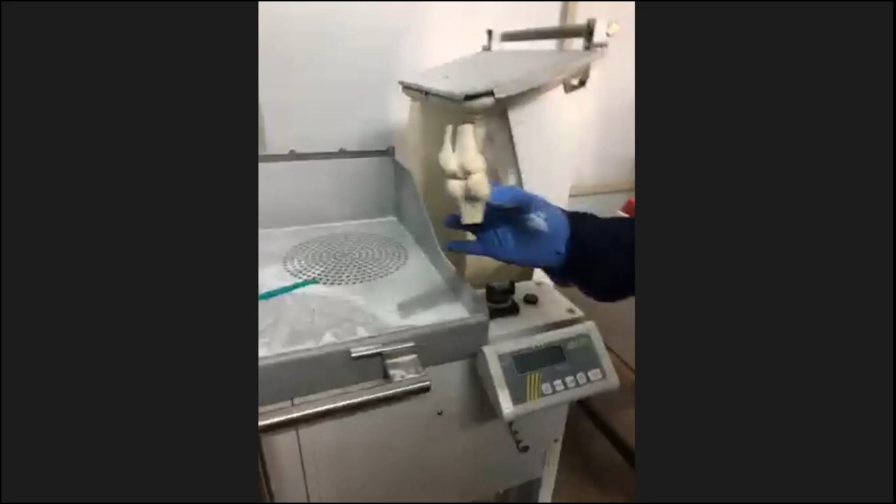So that's all about the SLS part. It starts from this mixer and ends here at the post-processing unit, and we get the final part like this. Thank you.

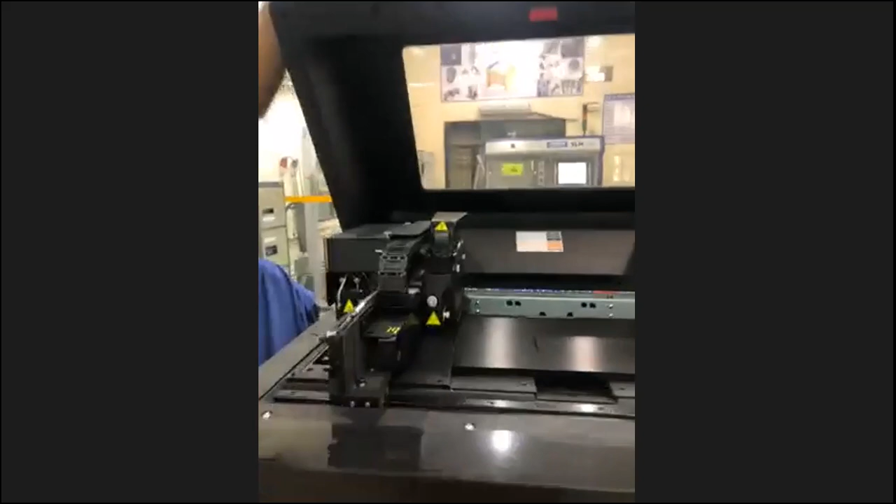In PolyJet technology, basically we use liquid. Stratasys offers customized resin only, so we should use Stratasys materials only. We have model material and support material. In PolyJet technology, you will definitely need supports. Model material is like the actual part that will be printed using this material.

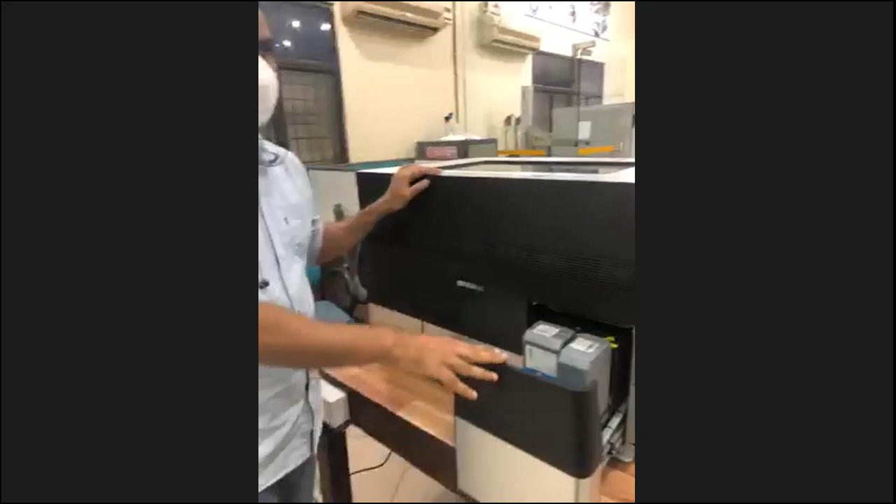This Stratasys PolyJet machine available at CPDM can only print 7 types of materials, categorized as the Vero family. As you can see here, this resin is Vero Clear. In the same Vero family, you have Vero White and Vero Black. So basically, using this machine, we can print only Vero family materials.

So if you come to the process of Stratasys PolyJet technology, this is our workbench.

Here you can see these two are nozzles, what we call nozzles, and this complete nozzle has small holes, like some number of holes which are less than our hair diameter. This one is for model material and this is for support material.

After model and support, followed by roller, then you are having UV light setup.

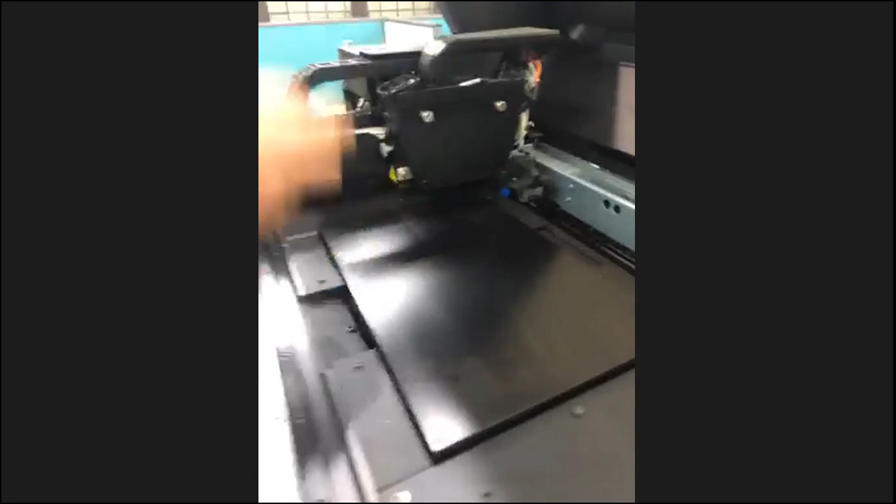So what happens here? First, material will be jetted on the platform. Resin will be jetted. When material liquid is jetted, it will be in curvature form, so the roller will come and flatten those curvatures. Here you can see small liquid jets have taken place, and this will be flattened using the roller. Then UV light will cure that resin and it will be solidified.

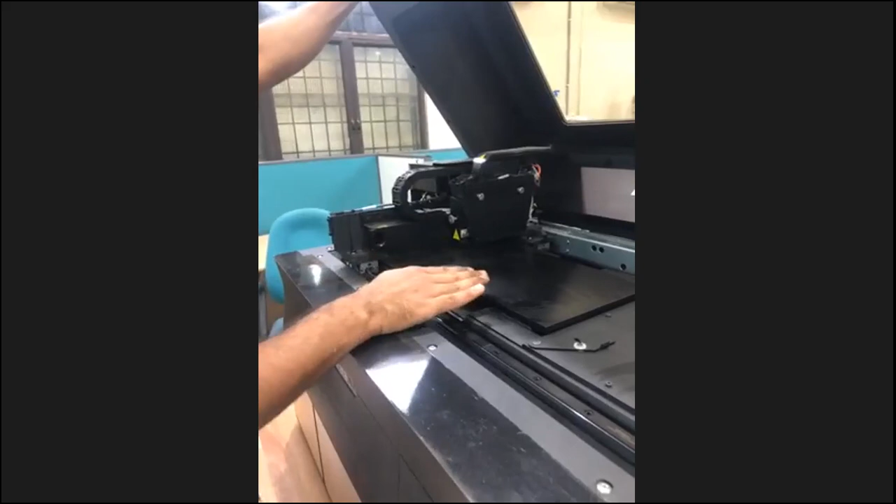We are also having DLP technology. Yesterday you have seen it, but when you compare DLP and PolyJet technology, in PolyJet you'll get more accurate fine finishing, and you can go for complex structures also.

But there are some limitations. You can see here, we are loading the liquid in reverse direction, and there are small needle-like things you can see here, and from here liquid will be traveling through these pipes. You can see all these pipelines, and these pipelines will be in the backside of the machine also, and from there they are connected to these nozzles over here.

So this is resin. Basically, we are using UV light to cure the resin. If you leave these pipelines for 10 days or 15 days unused, if you don't use this machine for 1 week, the material in this pipeline will be solidified. So to avoid all those problems, there will be regular maintenance procedures for this machine, which results in some material loss also.

But definitely when compared with all other 3D printers, this will be having a fine and good finishing.

So now I'll tell you about the software. Before that, I'll show you some parts printed using PolyJet technology. These are some fine parts. This is printed using Vero Clear, and this is Vero White. You can see it is very strong also. Very strong parts can be printed using PolyJet technology.

So this is basically the CPU of the machine. Here you can see heads temperature, support and model temperatures, vacuum pressure. As I said, it is stored in pipelines and it is in reverse direction. The liquid will always be dropping, so to hold that, there is some vacuum created so that there will be no continuous droplets falling.

And there's a wastage tank. As I said, there will be a regular waste material maintenance process, so in regular intervals we will be performing some operations like flush fill, pattern test. I'll explain what all those things are also. So here you can see material, how much material we are having. We are having Vero Clear now loaded, and SUP 706 is the support material which we use.

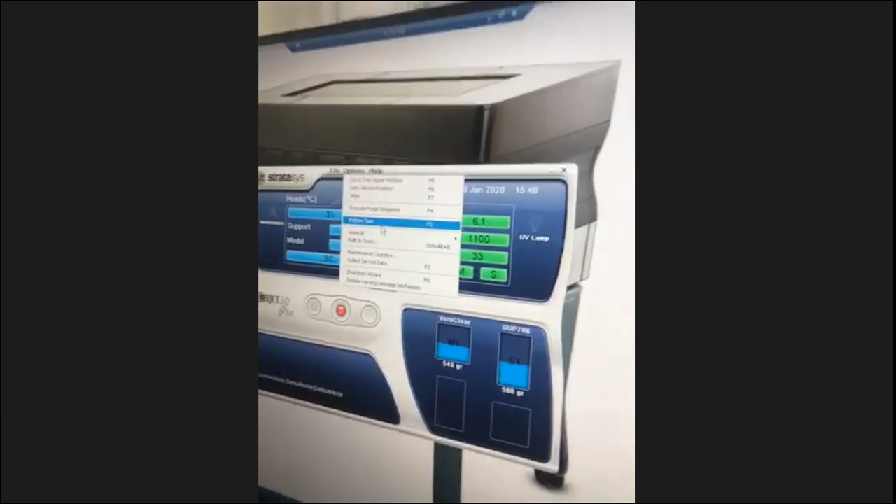To see whether the purge sequence is successfully done or not, you will be performing a pattern test. Pattern test is where you place a paper on the workbench. You have seen the workbench in the machine right now. So what we'll do is just place a paper here, stick it manually, and execute this purge sequence. When we run the purge sequence, this setup will jet the liquid.

See, similar to these lines, it will jet. If there is a gap between one line and the other, then there is some problem with the nozzle, so you have to run this purge sequence again.

But you can't keep running this purge sequence and pattern test many times. So there are some wizards here, like head alignments and head cleaning. Head cleaning is done at regular intervals, before and after printing, or you can just clean the heads manually.

Head optimizations and load cell calibrations are all maintenance related things. Material flush: if you run this wizard, material will be continuously flushed at high pressure for a number of cycles, say half an hour or 15 minutes, filling new material so the channels are cleared. If you want to replace the material, you must remove the complete resin in the pipelines, then perform material flush fill after the material replace.

You can also calibrate UV light. UV light calibration shows whether the UV light in this machine is in good condition or not.

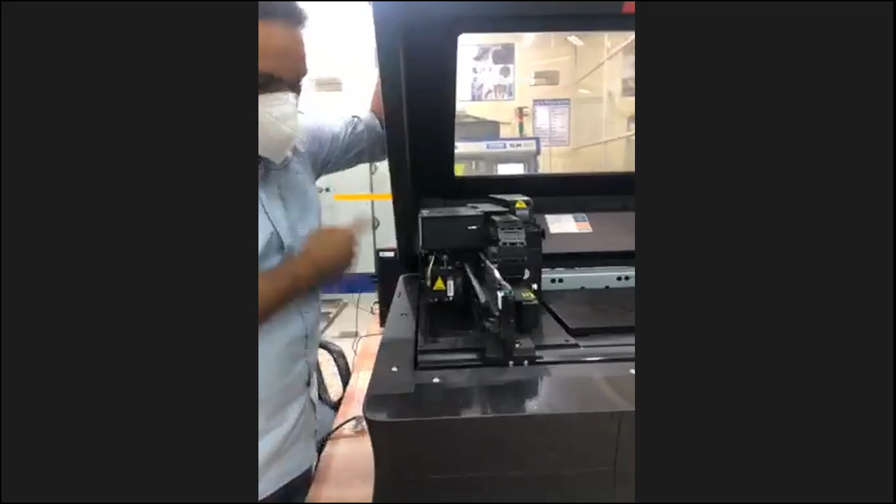Wiper cleaning: when you go for print, after around every 5 or 10 layers, there's a wiper inside that cleans these nozzles, so if some nozzles are idle, this wiper cleans the heads and removes any clogged material. So we should clean this nozzle at regular intervals too.

So this is the Objet Studio software. It's basically a slicing software where you can load a part here and insert a part. Let us select a bottle. So this bottle is loaded.

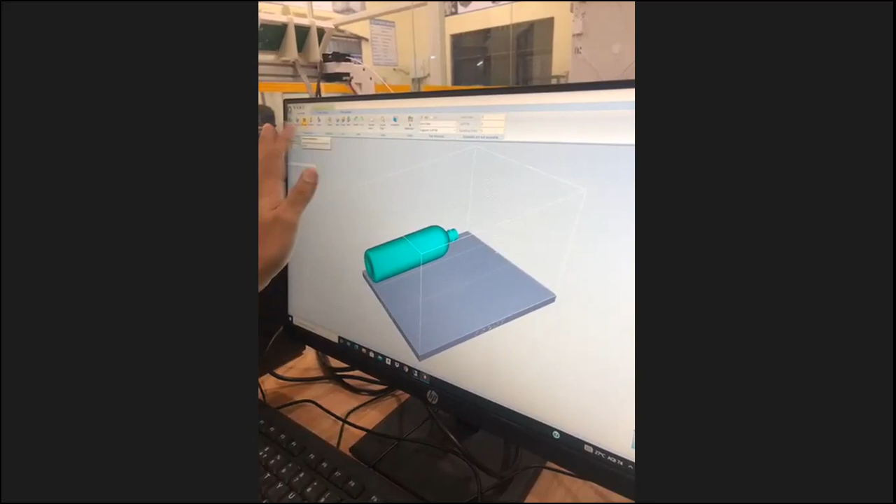Basically in this Objet Studio for PolyJet technology there are some limitations; it's not as friendly as Cura. Here you can go for placement, and it will place this part in the default position. Validate is where design validation takes place; if there are design errors, it will show in this validate section.

Estimate is a cost estimation, like time, material, how much support material it's using, and how much model material it's using. We can see this when you perform the estimate operation.

These are various views. As I said, there are only Vero family materials we can use here, like Vero Blue, Vero Clear, Vero Green, and Vero White. You can choose high quality or lower quality, glossy or matte finish. Only those kinds of settings are available in this software.

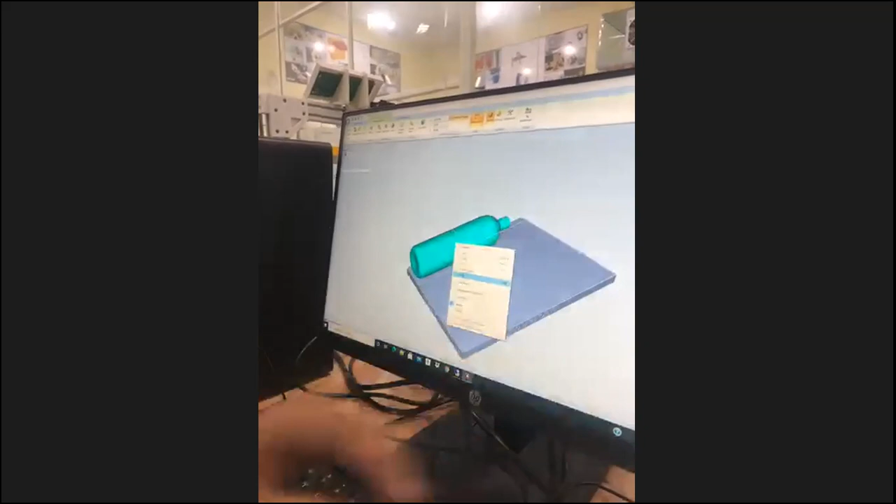Once you perform all these things and place it properly, you can scale it down or up, transform it, and place it at different positions. You can see here it shows X, Y, Z coordinates, now in millimeters.

After doing all these operations and performing the estimation, you press build. Once you build, it loads into this job manager chart, where you see how much time it will take, and the part is readily loaded but not yet given to the printer.

If you press on this, it goes online and the part is loaded onto the remote desktop in the system. Then you can see print start and which layer it's printing on, all visible in this setting.

Today we have covered PolyJet, SLM and SLS, which are available in our lab. If you have any doubts now, we can go for a question answering session.